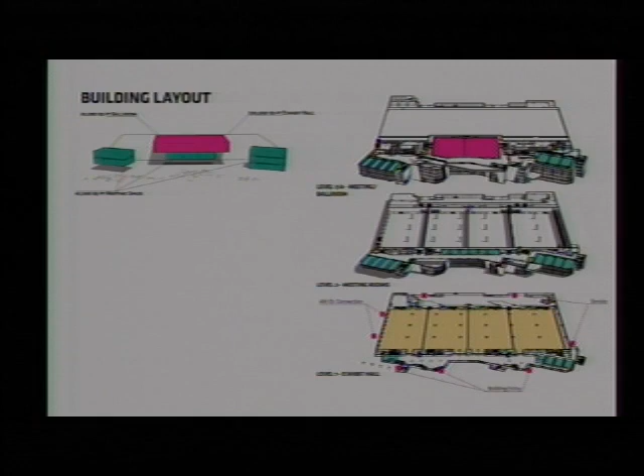So, building layout — same as it's always been, presented to all of you. Exhibit hall on the ground level, meeting rooms on level 2 meeting room mezzanine, and also up on the 3rd floor where the ballroom is located. I'm going to show you this earth-to-sky and core-to-shore diagram again, because we're going to refer to it when we look at some of the interior renderings in a few minutes.

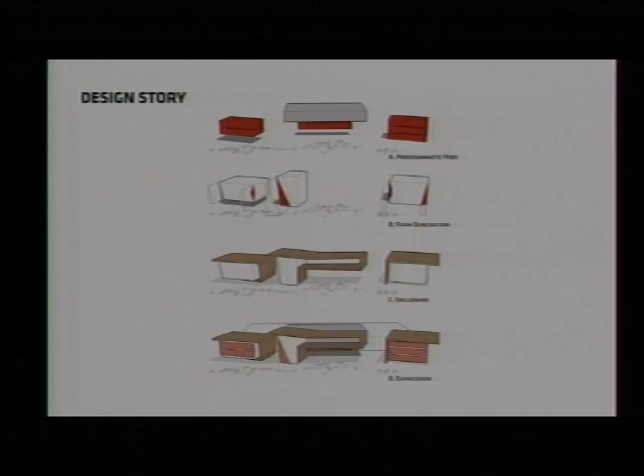And then the form of the building — these are some of the earlier sketches, just reminding you of where we were many months ago and how we've gotten to where we are today.

I've got some reference plans here, black and white plans, more for your printed packet than to present, but just showing you on the site plan, again to remind you of some of the alternates on the site. Everything shaded gray — the parking lot, 6th Street, the extension of Broadway from 6th to 7th, and then the enhancements to 4th Street on the north side of our building — those are all site alternates for our project. These were things that weren't originally in our scope of work, but things we're hoping, if bids come in favorably, we can get to do. We're documenting them.

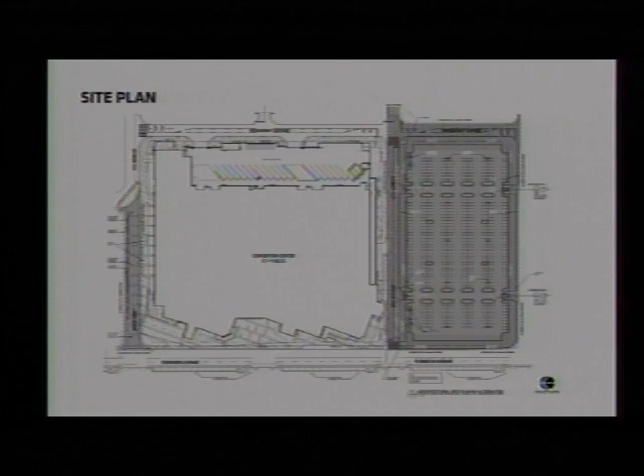So I'm going to click through these plans. If we need to refer to these, we can come back on anything if there are any questions.

So, exterior views — I think you've seen these updated renderings. We did these in the summer, I think, and I'm not quite sure when the last time we were in front of you was.

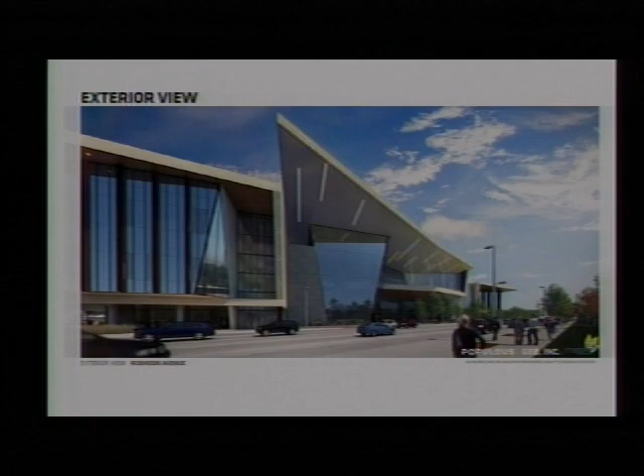Again, the main ballroom space with the large canopy and materials — we've gone ahead on some of these slides. We presented these to the DDRC and showed some of these materials off to the side, so we actually have samples today that I can hold up and point out.

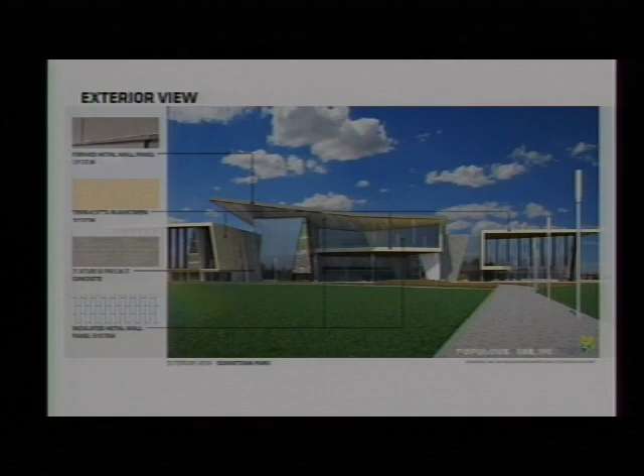So if you look at the top, you see the formed metal panel — that's this type of metal sample, and we can pass these around if we want. The terracotta rain screen — this is a sample of the terracotta material, and it's a thick, durable material. This is the color we've chosen, and you can see in the back it sits on a framing system that allows you to pull off each piece one at a time, should something happen or you need to access something.

And then you can see the insulated metal panel system. This is up there on the balcony, the soffit and stuff. This has a unique finish where it color changes depending on the angle of the light. I really like that product.

And then I don't have a sample of the precast concrete, but you can see that in the view, the two kind of wedges up there on each side of the ballroom. As we go to this view, a new material shown here is...

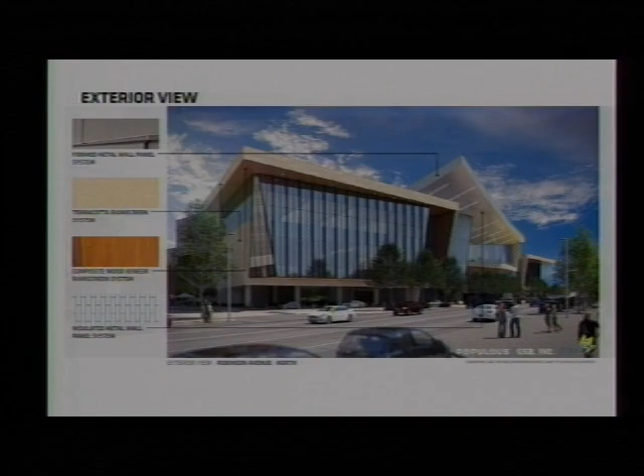the composite wood panel. This was a piece that the DDRC group wanted to know a little bit more about. We talked about its durability and how it can be cleaned, but the one point we made was that this is actually all up above the grade, so it's soffits and walls from level 2 and above, so really no one should ever really be touching this.

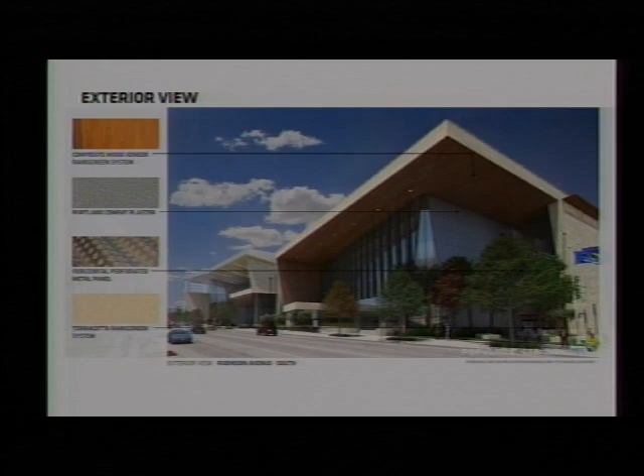Looking at it from the south here towards the north, you see the southern end of the meeting rooms. We do have a little bit of plaster on this side, which I have some sample material I'll show on the next slide. And then you see our perforated metal screen, which goes on the stair enclosures, and it also goes here on the east side of the building, which covers our loading dock.

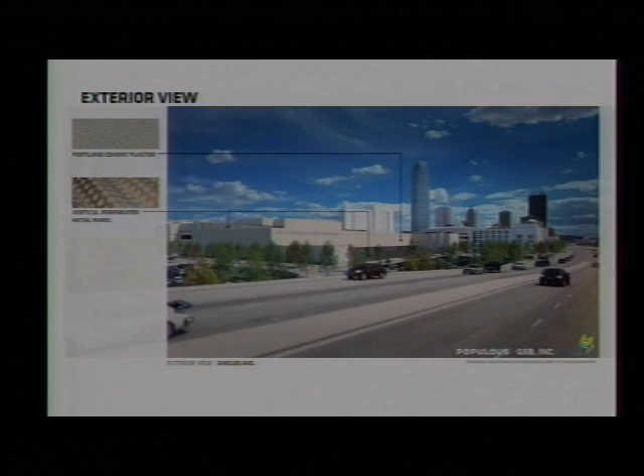So here's a sample of that material. This was one of the items that DDRC asked us to go back and look at a little closer. There was concern about how much you could really see through this pattern, and this is a 40% openness, so we're going to go back and look at some more tighter patterning and have it be more opaque to let less visibility through it.

And then one thing to point out on the plaster, on the north and south facades, we're using two different textures of the plaster. So it's the same color, but with a different texture. You'll get some different depth and shadow lines to it, and there's unique patterns on the north and south side with this stuff.

So again, just a couple quick views from different angles from the park, looking north along Robinson Street here near the parking lot, and the aerial that I'm sure you've all seen and we've discussed shows potential future development around our site.

And then the view from the ballroom balcony area.

So then we're going to jump into the interior views. I'm going to switch some of these out here real quick. Randy's going to help hold stuff for me here.

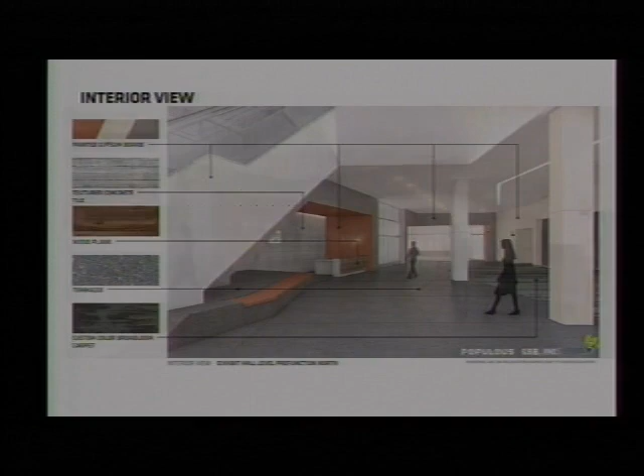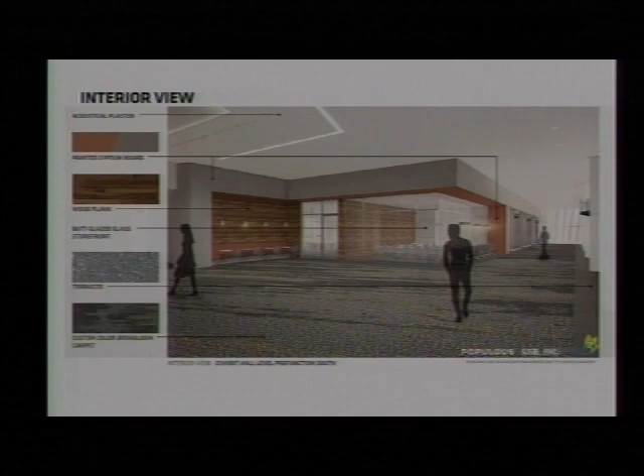So again, looking south at the meeting rooms on the exhibit hall level, you see this wood again. You start to see the same carpet. You see just a little bit of the terrazzo along the curtain wall glass there.

As you move up to the atrium space, you can see how open it is and how much light is going to spill into this area. Really excited about this, and how the materials start to transition from darker at the bottom and carry up to the ballroom level.

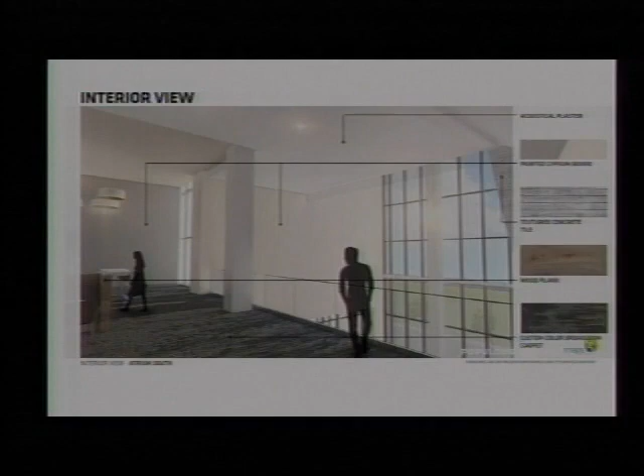This is towards the southern atrium. You start to get a glimpse of an open meeting space to the left-hand side of the image. You see some of the lights and seating starting to show up there.

And this would be a view coming in at this level. You see the wood off to the right, that's the meeting rooms at level 2, and that uses a wood like this along the entry spaces. And then to the left, we've got these little seating areas, or lounges we've been calling them. This is an example of some of the fabric that would be on the fabric panels in that seating area.

This view is actually as if you were just coming off the hotel bridge into the building. So this is the view you would get. And you notice as you look down, if you were a first-time hotel guest coming to the convention center, you have a clear shot of where the circulation is—the two escalators to either go down and register for an event at the exhibit hall, or maybe you're going to an event in the ballroom and you knew you're going there, you can go straight up to the ballroom.

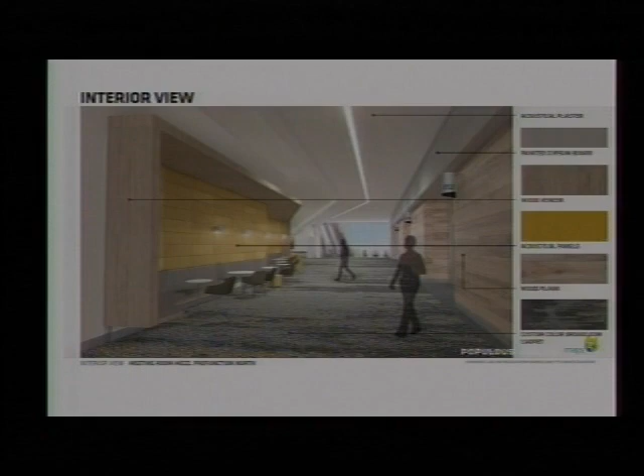This is that exact same area, but at the other end near the escalators. You're looking back towards the meeting room spaces. Again, you're seeing an entrance into the bridge in the far distance in this view. Again, looking at signage on the walls over the meeting spaces, how the rooms are numbered, that kind of stuff. This is all how it's been currently designed.

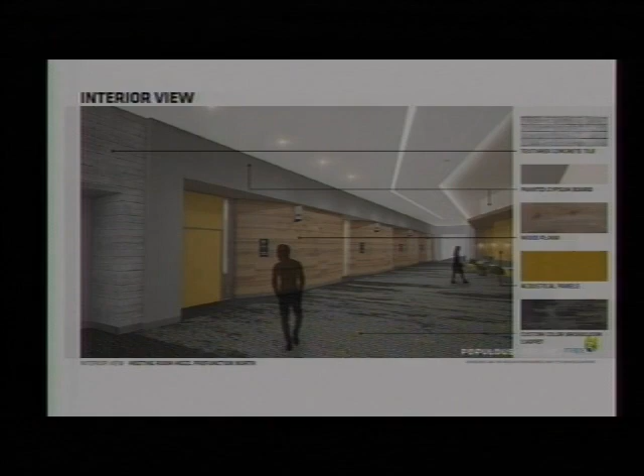This is at the south end. You see that open meeting space that I referred to before. You start to see the different types of furniture and built-in tables and other things that work around this space.

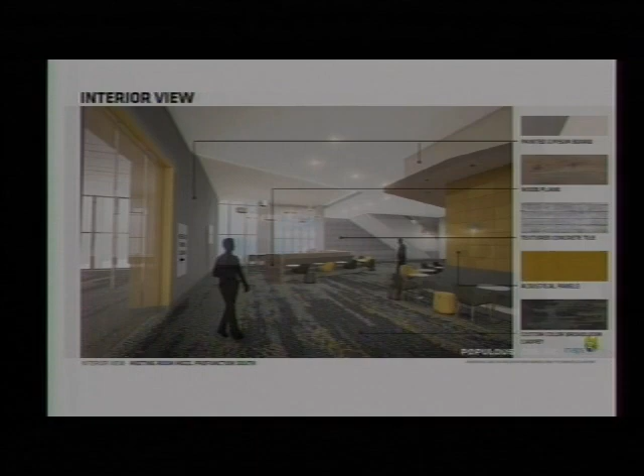There's another view of that area. This will be a pretty active space up on the level 2 area.

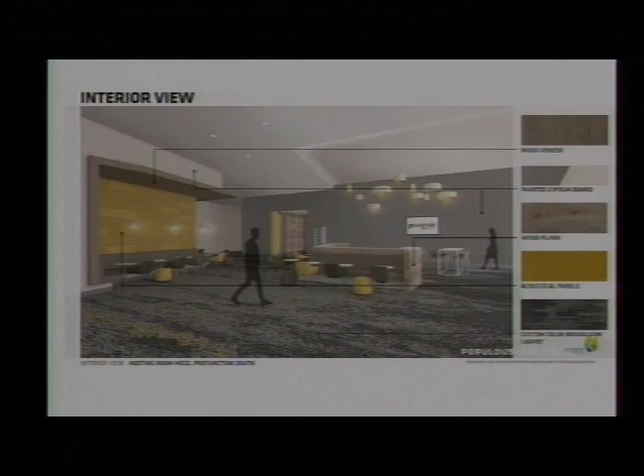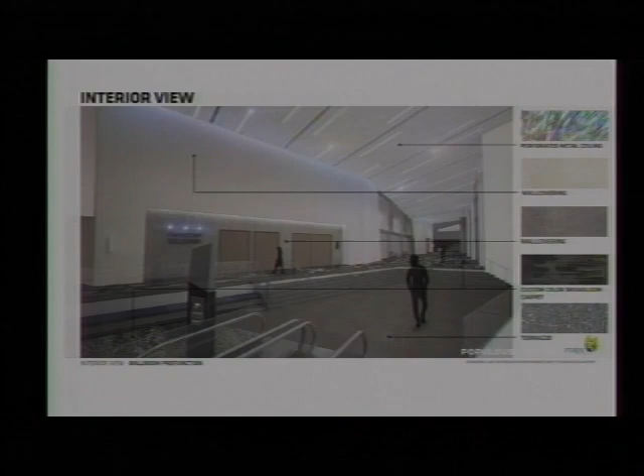And then as you get up to the ballroom, the finishes get much lighter and a lot more elegant as you go up. So you start to see the wall coverings are different fabrics and wall coverings. This one is kind of a glittery, shimmery look, again helping relate to the sky colors that we're doing.

You see the perforated metal ceiling. This is a sample of that ceiling, and the patterning is quite more extensive than just this little piece. The panels are, I think, 2x4 or 2x6 in size. And it's not necessarily white—I think it's more of a silvery panel, but this is what you'd start to see in the ceiling space. And then you start to see other fabrics wrapped around, like the doors, other wall coverings.

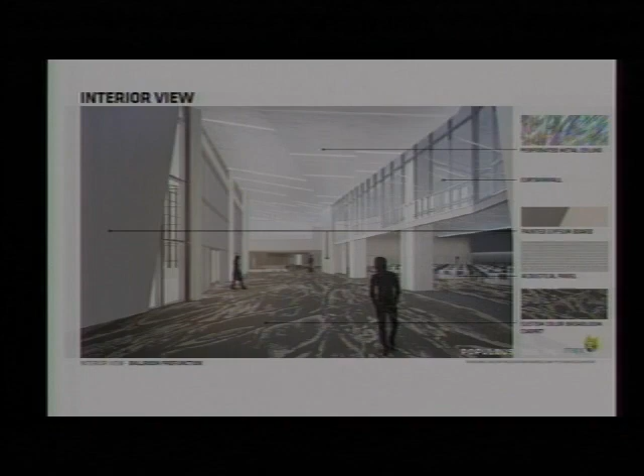Again, that carpet is what's shown as you get up to the ballroom level. This carpet would carry from the pre-function into the ballroom space. And as you can see in this view, that's with the ballroom entrance closed. And then that's with the doors slid apart, and you get the ability to open up the ballroom space into the pre-function here. And then when you're inside the ballroom, this is again with the doors and the curtain wall there, you start to get those views out to the sky, leading you out to the balcony.

This is a view of the junior ballroom, and we have pretty much the same finishes. It has this same ceiling used in it in a little bit different way than the ballroom has it. You start to see fabric on the walls for the acoustic panels to help with the sound inside the space, and then the big glass windows out to the side.

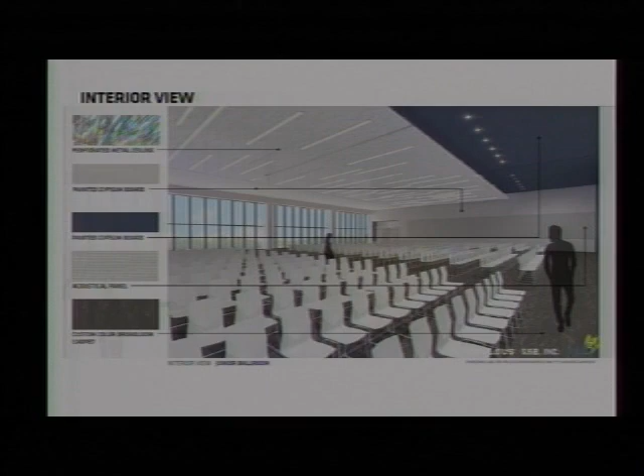This is a view inside the meeting room. Again, finishes are very similar to what we've already held up from the other spaces. There's acoustic panels with a fabric similar to this on the walls.

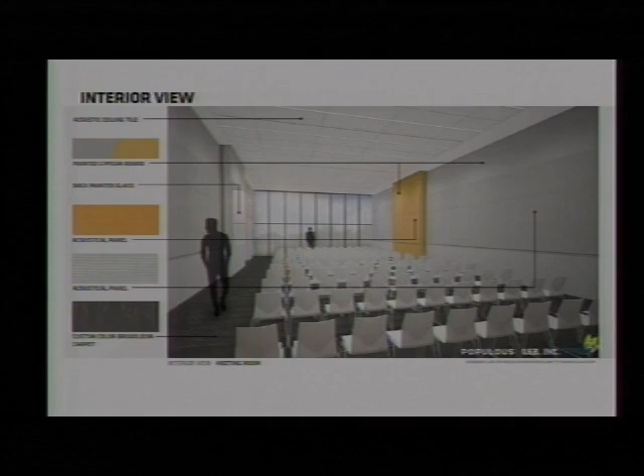The yellow you see along there is another fabric, but on the opposite side we have back-painted glass that lets in marker board capabilities in the rooms. All these rooms are fully shaded with abilities to be blackout if needed. The ceilings are acoustical tile ceilings for sound quality.

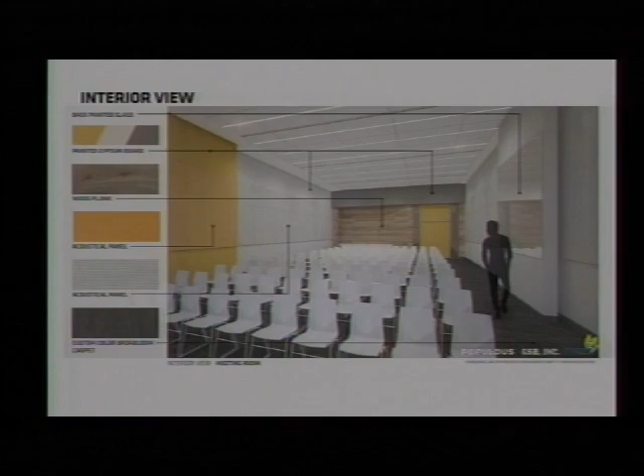And then that's that same space looking back. Remember, some of these rooms are more divisible than others, so this is a single room that in some levels, as you go up, some of the walls can move and be open so you can get a bigger space or double the size of these rooms.

You start to see the wood plank I'll go back to from what we were showing from the outside. The other plank, the bigger one, yeah. So you start to see some of the wood finishes in these rooms on the inside. There's countertops in the back there.

These are actually 4 by 8 pieces of tile. So think of a full sheet of plywood. That's one piece of tile.

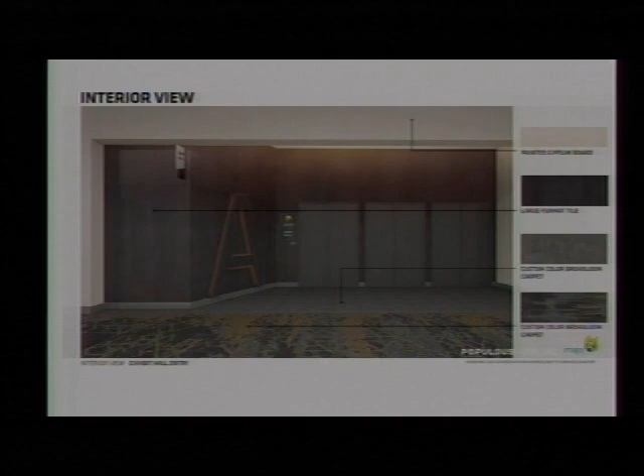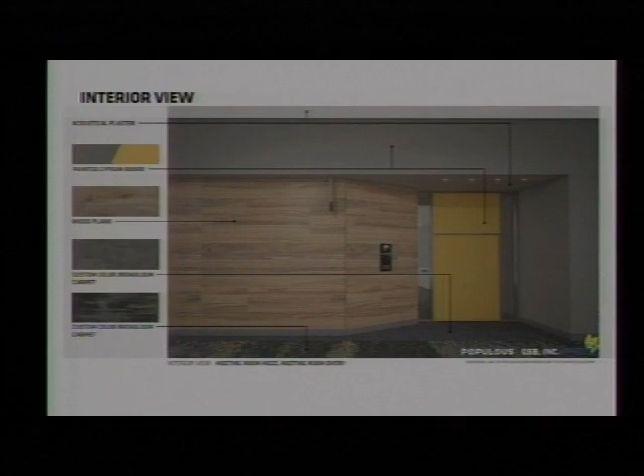And you see some of the signage and identification as you get into these spaces. Again, this is the meeting rooms at that level, at the exhibit hall level, still using the tile. The wood we talked about continues as you get up to the next level for the meeting room spaces. And then when you get up to the ballroom, you've got more of the shimmery wall coverings in the lighter colors.

So the first item is the exhibit hall partitions. We basically have said on base bid, you'll be able to divide the exhibit hall into 2 right down the middle. The alternate allows 2 more sets of wall panels to help divide the space into 4 rooms instead of just 2, and there are 2 separate costs associated with each panel.

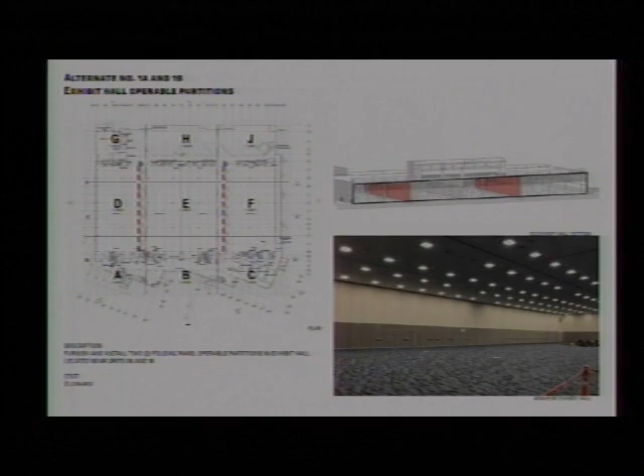Now what's interesting or good about this alternate is all the steel, all the track, all the closet space, all of that's going to be built on day 1. It's just buying the door to fit into the frame, basically. So once we buy the panels or have the money, we can just purchase the panels and they can be installed. There's no demolition or redo or anything that has to happen besides just putting them in place.

The second alternate we looked at was the vertical shade fins on the exterior. This is an aesthetic thing that we really like that does some performance help for the building when the rooms aren't being used. Again, these are attached to the existing mullions that are holding the curtain wall system up.

These items can be added at any time. The connections will be there. It's kind of a plug-and-play or snap-in-place type system, and it shouldn't cause any sort of condition where you've got to tear something out or redo anything.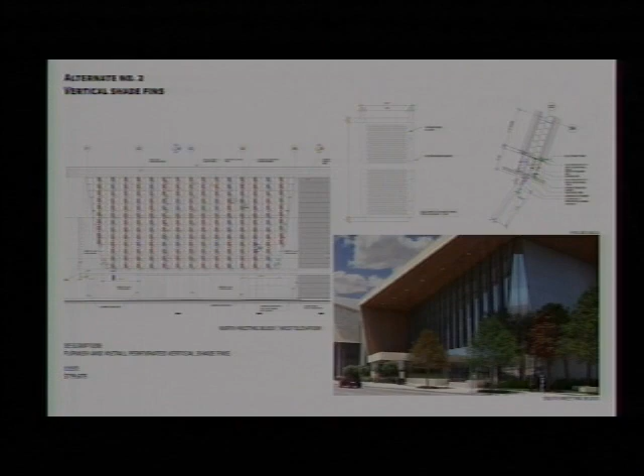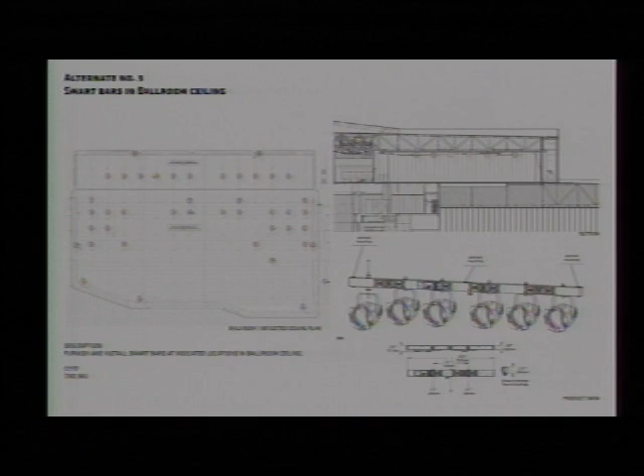The third item is a unique feature we've added to the ballroom level: a sound smart bar with power and the ability to hang theatrical lights. You can see the multiple locations in the space we've designed for this item. It allows stages to be set in different pieces of the ballroom, eliminating the need to bring in lighting and sound trees with different rigging. It's all built into place now, so they can just plug and play. It's a really cool feature that we think will set this ballroom apart from others.

But our operator has voiced the concern that it's a really cool feature, but may not get used as much as we think. They just don't know - they'd never seen it done before, so they're not sure it would get used all the time. So we said, let's put it as an alternate and see if we can get it.

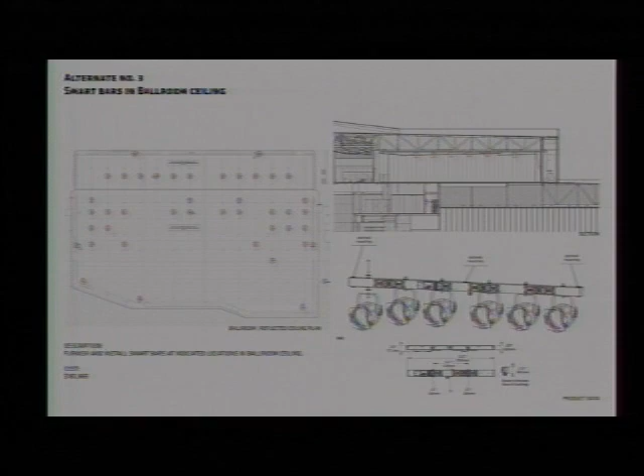The fourth item is the central plant equipment. The central plant, shown on the plans on the left, is located in the northeast corner of our building, over by the loading dock. There was a late change in the last couple weeks, through a large study with the MAPS team, the city, and Veolia. We've done a lot of back and forth discussions and studies on what it would cost if Veolia would provide cold and hot services to the building.

Rather than us providing it through our own chillers and boilers in the plant, we've decided the base bid of the project will have Veolia serve the building, with an alternate that we could provide the equipment ourselves. This means on day one, this space will be built as designed - structure, walls, everything - but would be a pretty empty space, with Veolia only having minor equipment in that space.

This is great for two reasons. One, it provides extra storage for our building - the operator is going to love having some extra storage space back here near the loading dock. Two, it gives the city the ability to, at any time, should they decide to go a different route, bring this equipment back in. It's already designed to hold all that equipment, all the room is there. There won't be any redo of tearing out walls or rebuilding a bigger plant - it's all been designed for that. So whether it goes either way at bid time, we feel we can get either option. It just gives us some additional flexibility for our building right now.

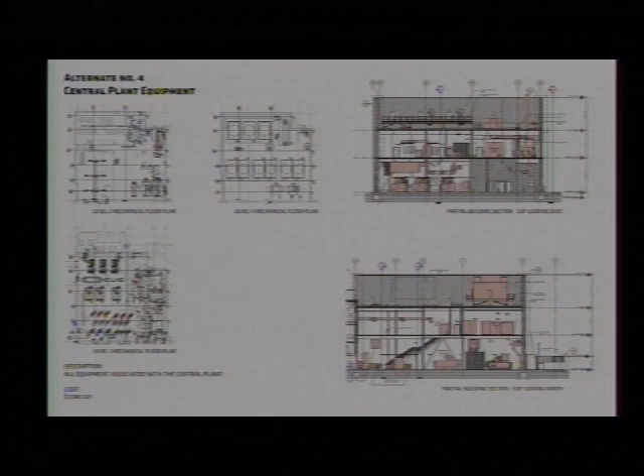The fifth alternate is the surface parking lot, which relates to the building expanding someday - this is what would be built in place until that time. That also includes the extension of Broadway from 6th to 7th.

This was one of the items that DDRC asked us to add some additional things to. They wanted sidewalks to go around the entire surface parking lot and some internal pedestrian ways added. Once we update the drawings, we'll send that to them, and hopefully staff review will pass it on as approved.

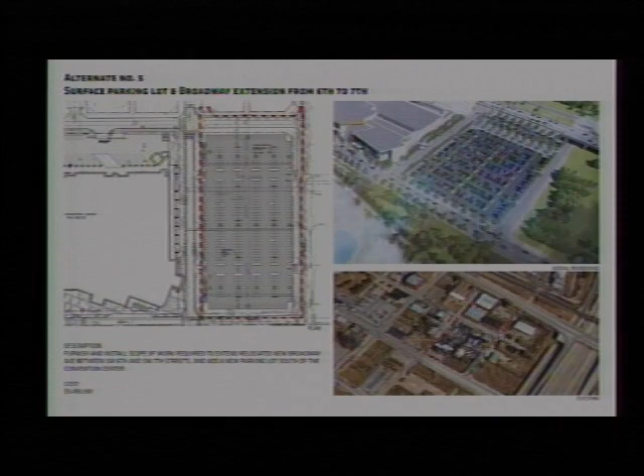Alternate 6 is the enhancements to 6th Street. We decided to break this out of the parking lot alternate just for flexibility - who knows how the numbers would come in, maybe we'd fix 6th Street and not something else, or vice versa. So just to have a little bit more flexibility on the pieces. Again, these aren't extremely large or costly alternates.

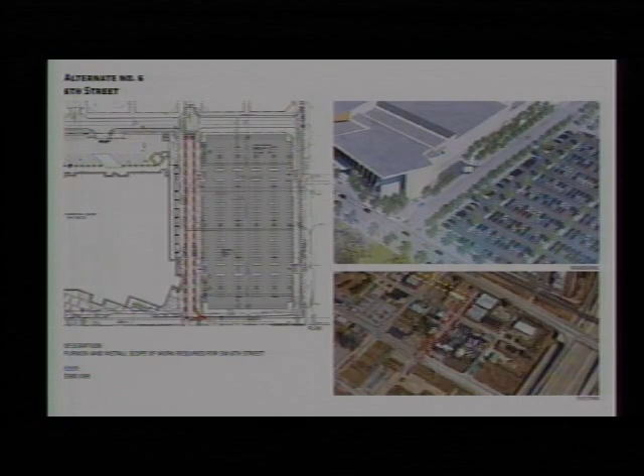And then the enhancements to 4th Street - this is taking our current plaza that we have up to the curb on our side and carrying it across the street, redoing 4th Street to help make it a little bit more of a pedestrian-friendly environment. That's enhanced pavers, more trees, reduced curbs, that kind of thing.

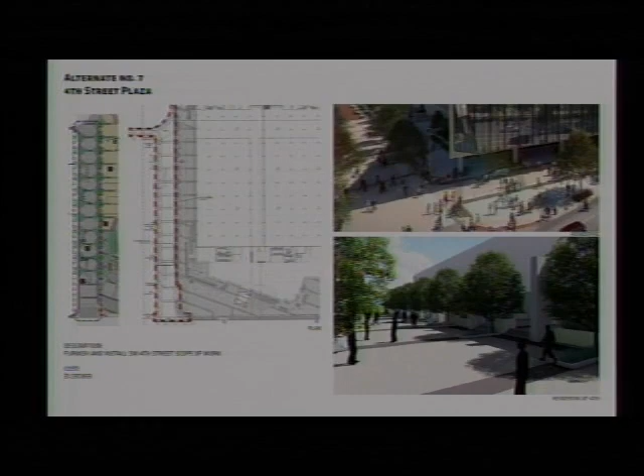We're obviously working with the hotel team, trying to let them catch up, to see how this current design affects whatever they may have on the south side of their building, whether they're going to have a restaurant or stores along that side. We're not sure, and I'm not sure they're ready to say, but we'll work with them when that time comes.

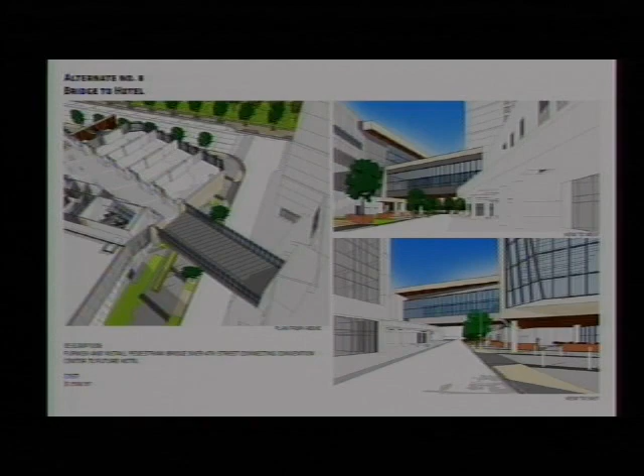And then alternate 8 is the pedestrian bridge to the hotel, very similar to the 4th Street enhancement. We've got a design that works on our side, but we need to work with the hotel team on how it can be received on their side. We're continuing to draw what you see here, getting as much feedback as we can from them, and we'll issue this as an alternate to get priced with all the other pieces of the project.

So next steps, we're going to finish picking up all remaining comments from the city and our consultant teams and get those into the final plans. We need to finish or continue to get approvals on things. Now that we have DDRC complete, we need to go to the Board of Adjustment and get our variances done, and get permits and other things ready to get issued once our drawings are there. Then we need to come back in front of our subcommittee and you guys to present our final plans, and we hope to do that very soon. Then hopefully go to council, and then after that we can go out to bid.

Any questions? I have a question. Are the alternates prioritized? They are not, and I think they would be prioritized by our subcommittee, or with our subcommittee and city's help on what they feel is more important or things that they want to get. Obviously, as the design team, we would have probably some preferences too, but for now we want to see where the bids come in and see which ones we could take.

Michael? If we don't do the parking lot to the south, what happens to that? Is that just dirt, or are we going to at least sod it or do something with it if we don't do the parking lot? If we, as in the convention center team, can't afford it, I trust the city would look at other ways to try and get something there. I'm sure they don't want a big dirt field or grass lot there. And there's other projects I think that would also want it to be a parking lot at least at day one.

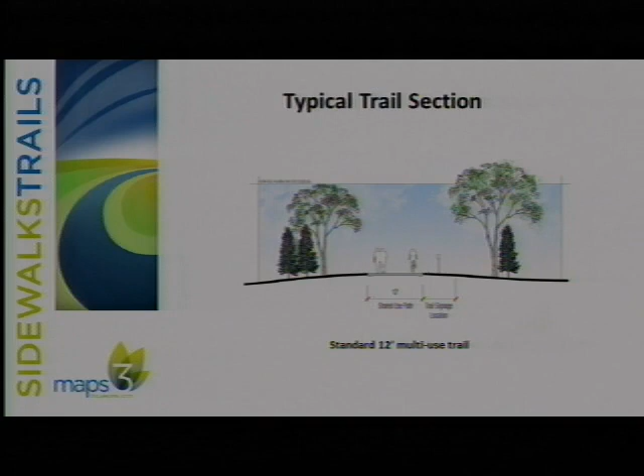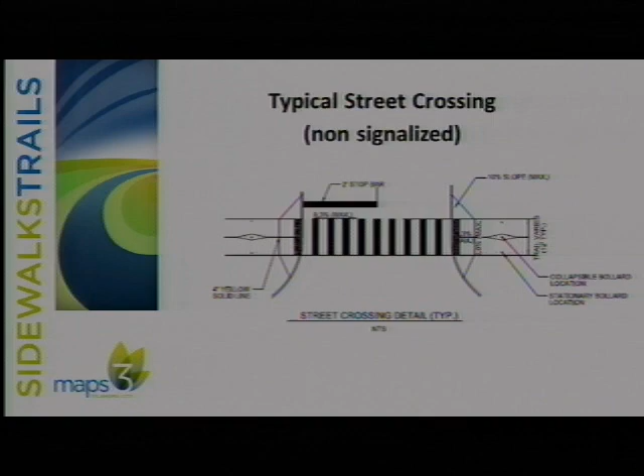The typical trail section does follow the master plan. It's a 12-foot wide shared use trail, very similar to all the other trail systems in Oklahoma City. We typically have non-signalized street crossings through this area. It will be concrete throughout, so it's a consistent path and surface for the pedestrians and bicycle users, and it does follow the city standard.

The first section is the one we had the opportunity to design, on the west side, as we mentioned earlier. Our length is a little shy of 5 miles. It has accessibility to the Draper Marina, where there is an existing parking lot that we may be able to use as shared for a trailhead location.

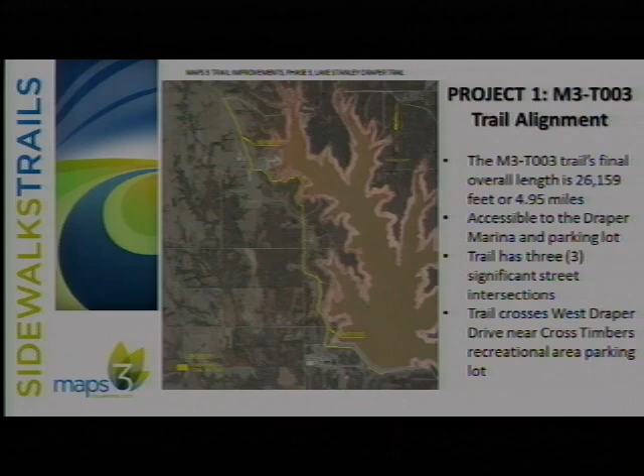It has 3 significant intersection crossings, one at 89th Street, one at 104th Street, and then down at Water Plant Road. We'll show pictures of those in just a second. We also have some connectivity to the Cross Timbers area, multi-use area, as well as their parking lot, so we tried to incorporate some existing features with the trail design to piggyback off of those. In the narrow sections, we broke this down between the north, central, and southern sections of our trail.

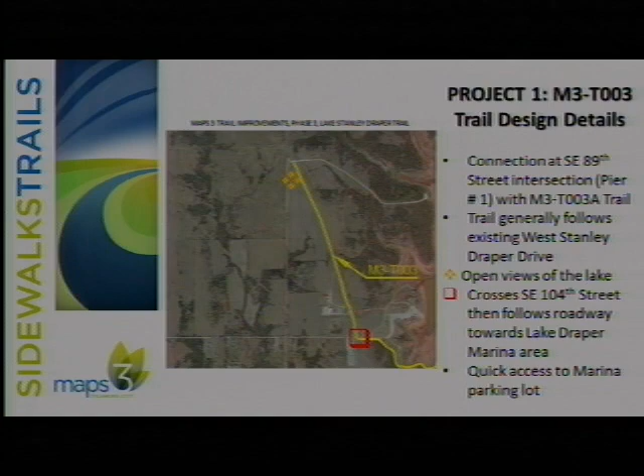As we continue a little bit farther south, we get closer to a connection at the marina, where we now take the trail off of Lake Draper Drive and down a little closer to the shoreline. This was a great suggestion by the subcommittee to get a little bit closer to the water so we can see this.

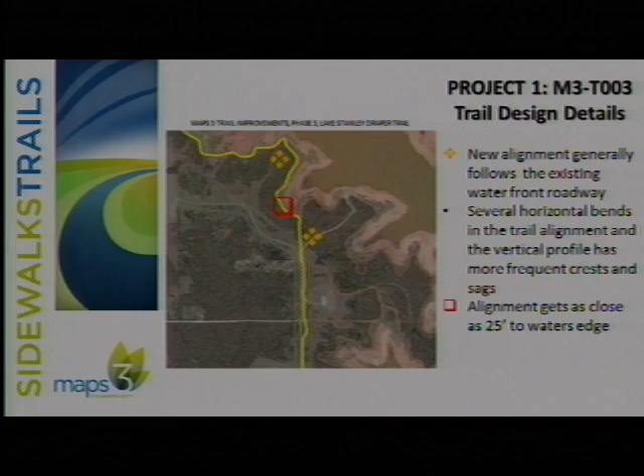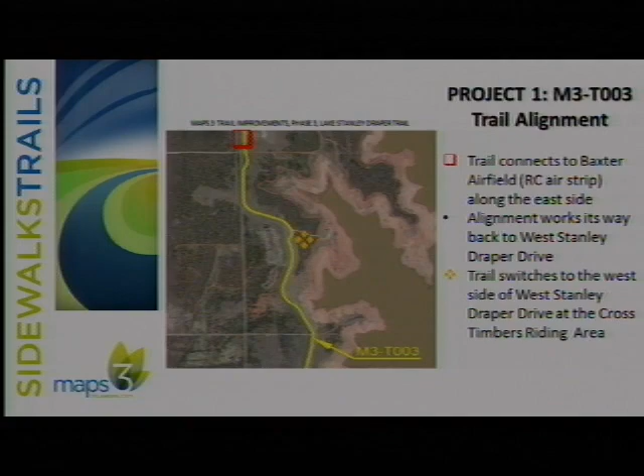As we cross Draper Drive, that is a 45-mile-an-hour speed limit roadway. We made sure to put provisions for vehicular traffic—advance warning that there's a trail crossing coming up, with normal signage per the Manual on Uniform Traffic Control Devices. We also did that along the trail to warn pedestrians and bike users that they're getting ready to cross a street, so they may want to slow down. So we have advance warning on both the roadway and the trail where we have the crossing at this location. It will not be signalized.

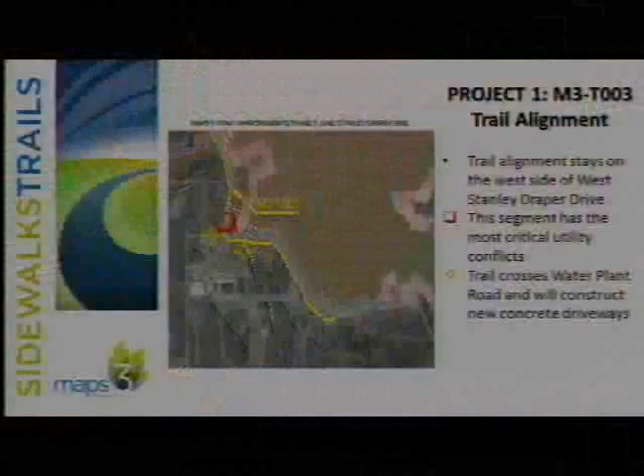As we move a little farther close to Water Plant Road, this is the southern end of our segment through here. One of the major critical utility potential conflicts: we cross two of the large diameter water mains that come out of the water treatment facility. We've made sure provisions are shown in our documents and final plans to protect those so we do not have a water main break during construction. We're not so much worried about once the trail is installed and being used—it's more the construction traffic working in close proximity to those water mains. We've made provisions in the contract documents to take care of that and alleviate those potential conflicts.

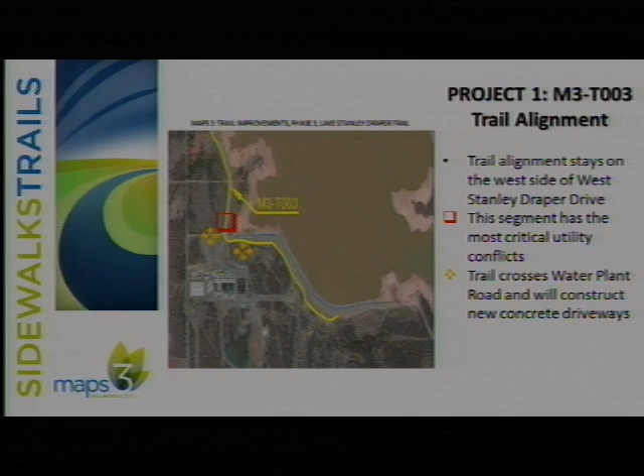We also know that during this time the trail is constructed, the water treatment plant is undergoing an expansion through here. So when we get through with the trail, we will be first. We'll make sure this intersection is improved with concrete drives that will support construction traffic for the water treatment plant, as well as support the trail itself through there.

As we go a little farther, this is the location where the trail alignment, looking basically east, starts to go below the dam. It's one of the nicer areas, but the thing is we want folks traveling along the dam road to look down upon the trail and see that it's a safe facility. If they're bicycle users up there, we want them to see they have another alternative to get on the trail system below the dam and get off the roadway and away from vehicular traffic.

The construction cost estimate we've looked at is for the 100% complete design. We started out with an initial budget of $3.4 million. As we went through the preliminary design and then the 60% conceptual design, we were basically still on budget at that point. Currently, our budget estimate is a little over $3.4 million, roughly $50,000 above what we estimated. However, we have a 6% contingency in our estimate right now that is just shy of $200,000. So if we were to take that contingency out, we're essentially at $3.27 million, which is under budget for this project.

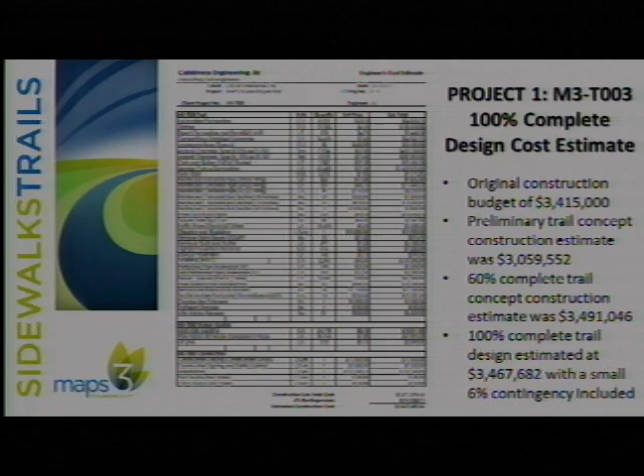The anticipated schedule, pending approval and acceptance by the committee today, we're ready to advertise this project in November, take bids in December of this year, and then start construction right after the first of the year, weather permitting, and complete construction in the summer of 2018.

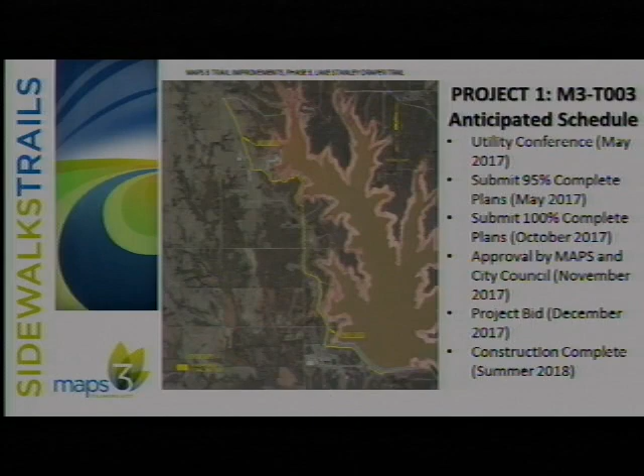This will dovetail along with Triad's portion as well, so we'll have quite a bit of the trail around the lake completed, hopefully by the end of summer next year. With that, be happy to take any questions.

Questions? I take it from what you say that the construction of the different projects will be going on at the same time. Concurrently, yes, concurrently. That's the word I was looking for. Thank you, thank you, appreciate it.

It's been moved and seconded that we approve the resolution. Is there further discussion? All in favor say aye. Aye. Opposed, no. It is approved.

Item 9, David. Item 9 is recommend resolution approving final plans and specifications to be advertised for bids, MAPS 3 Trail Improvements, Phase 3, Project 3, Lake Stanley Draper Trail, and authorize city clerk to advertise for bids, to be advertised November 29, 2017, Project M3-T003B. This is the second of the 3 sections, and Robbie Williams is here from Triad Design Group to show you what his plans include.

Good morning, we will go through our project. We're actually phase project 3. I'm not going to reiterate a lot of the design elements that Mr. Cabbiness just went through. All 3 engineering companies have worked together on details, so we can all be consistent as we construct the project. So with that, we'll get started.

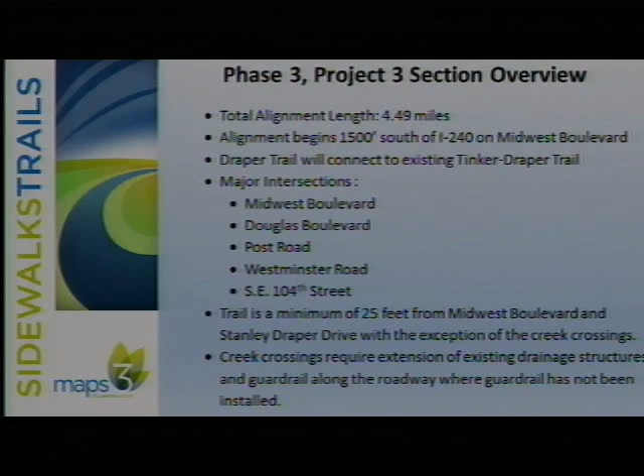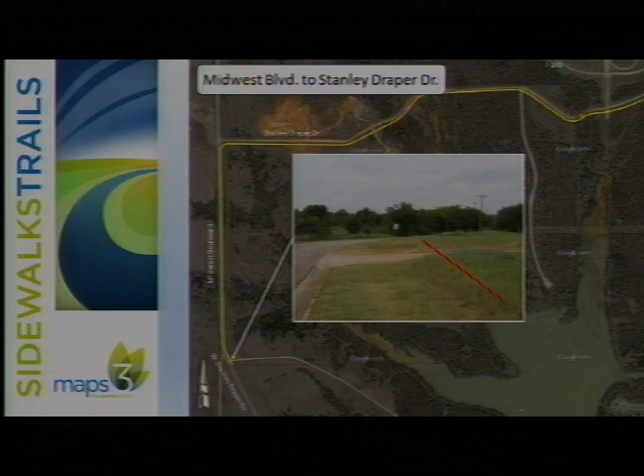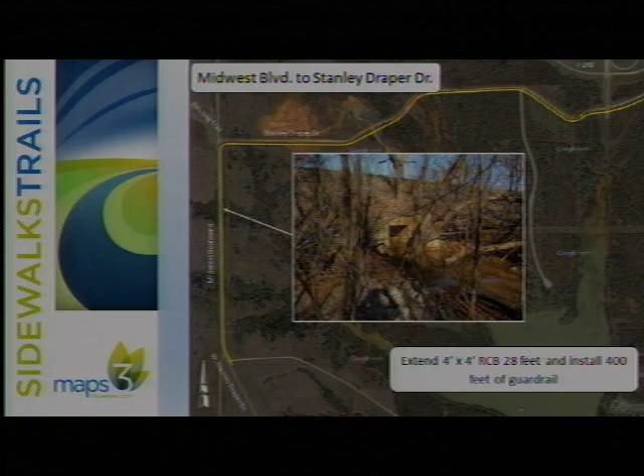The red line in the pictures is the location of where the trail will be. Again, this is where we will connect to Cabbiness's trail on Midwest Boulevard, and we will go north. We will be clearing trees, but we are going to minimize the trees that we remove. Here's a drainage structure that we will extend and construct the trail on top of. This is the connection to the Tinker Draper Trail at the corner of Stanley Draper Drive and Midwest Boulevard.

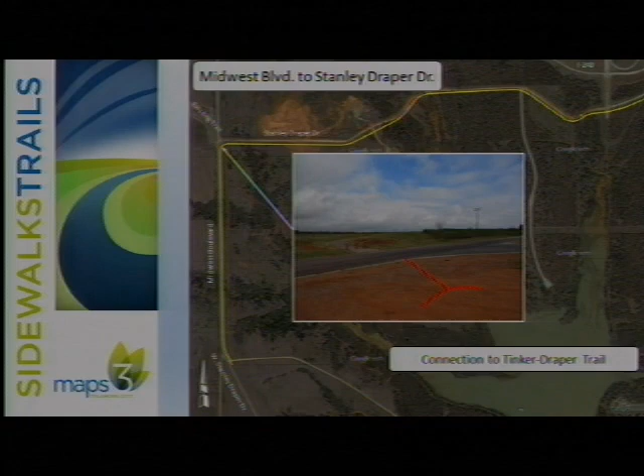As we go along Stanley Draper Drive, the Water Trust just reconstructed this road. It has a design speed limit of 25 miles an hour; however, if you drive out there, the public is driving a little bit faster. So we're still making sure we have the trail 25 feet from the road for safety.

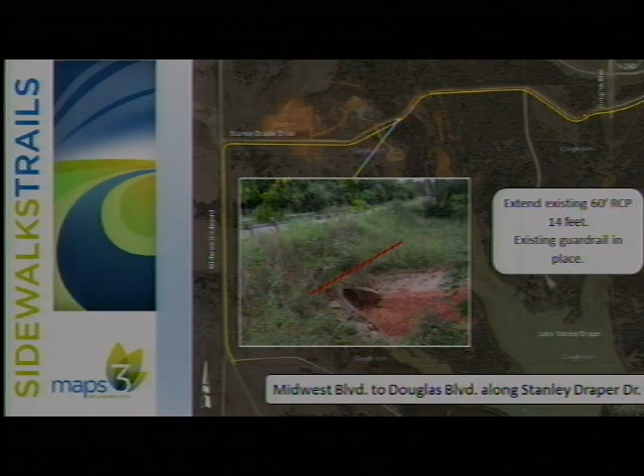Again, we have several small structures that we will be crossing. Here's another one. And although our trail is a little far from the lake, there are views where people will be able to see it, and this is an example of that. As you can see, when the Water Trust built the new Stanley Draper roadway, they did some bar ditch work and things like that, so we'll be able to take advantage of installing our trail south of that to take care of drainage and save some money.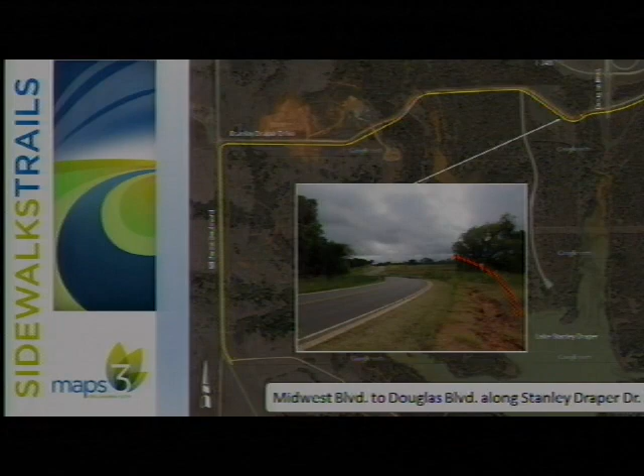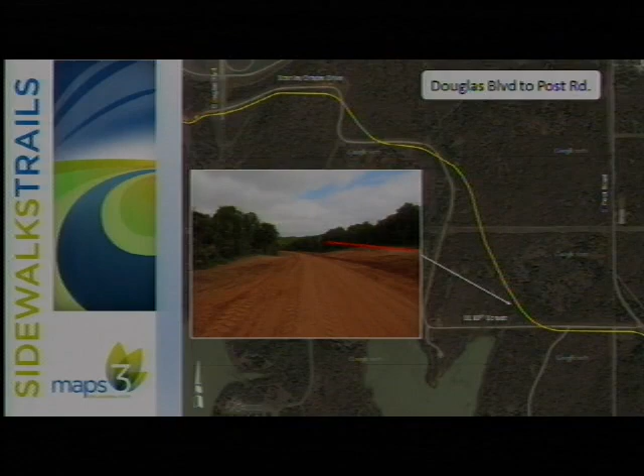Again, here's another structure they constructed that we will extend. As we get more on the east side of Stanley Draper Drive, we get into a heavy wooded vegetative area, and we've been instructed to minimize tree removal. As you can see here, they've cleared some portions when they did the roadway, where we will not have to remove any trees. However, as we continue south, this is the unimproved Stanley Draper Drive, and you can see that we will be removing trees to install the trail.

Again, our project schedule is to bid the project in November. We would like to start construction in January, and we believe we will be finished by the end of August of 2018.

So with that, if anybody has any questions, I'll be glad to answer them. Questions? Thank you, Robbie. All right, thank you.

Been moved and seconded. We approve this resolution. Further discussion? All in favor say aye. Aye. Opposed, no. It is approved.

Item 10, David. Item 10 is recommend resolution approving amendment number 4, MAPS 3 Phase 3, Project 1, sidewalk improvements, increase of $724.75, Project M3-W003. Again, project that's in construction, quantity adjustments of just $724.